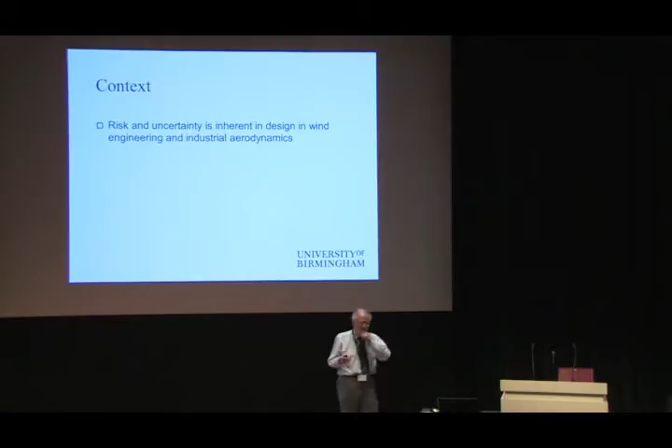Okay, what am I going to talk about today? I have come to some conclusion as to what I wish to talk about. Obviously, risk and uncertainty in wind engineering is inherent to the game. That's always going to be there.

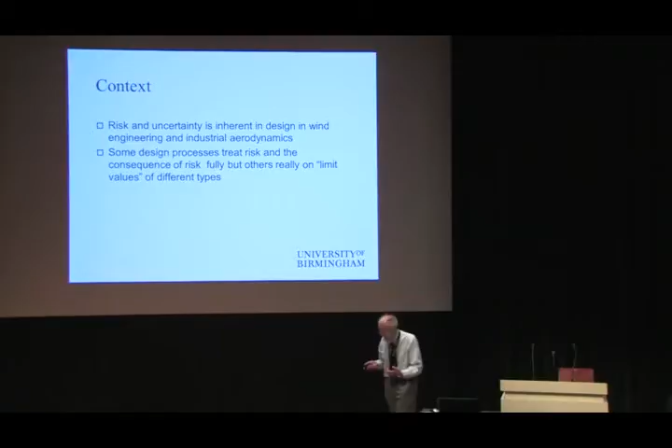Some design processes treat risk fully through risk analysis. Others tend to rely on what you might call limit values of different types. This presentation is an exploration of my own thinking on the relationship between risk and limit-based approaches, and I'm going to illustrate it through a range of applications. It's very provisional thinking. I'm working on the basis that you're a kind audience out there, and I hope you don't disappoint me.

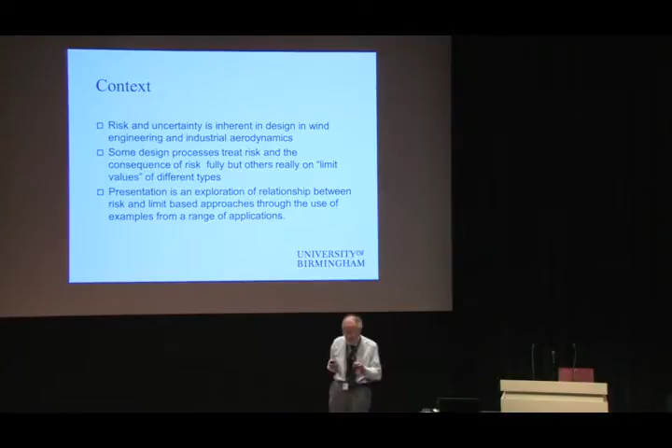These are really some thoughts I'm having at the moment, some ideas about where work might go in the future. The context: I'll give some sort of generalized framework, then go through a series of examples, and these examples are basically things from my own experience. Coming on to talk about risk and limits, and I also want to talk about the consequences of failure of systems, and end with some concluding thoughts.

So that's for the system, but then we probably need to think about the operation of the system as well, and the consequence of the failure. If the consequence of a system failing is unacceptable, we can do one of three things: we can change the strength of the system somehow, we may be able to change the stress applied, and we may be able to change the operation. Keep that generalized framework in mind, because I'll be coming back to it.

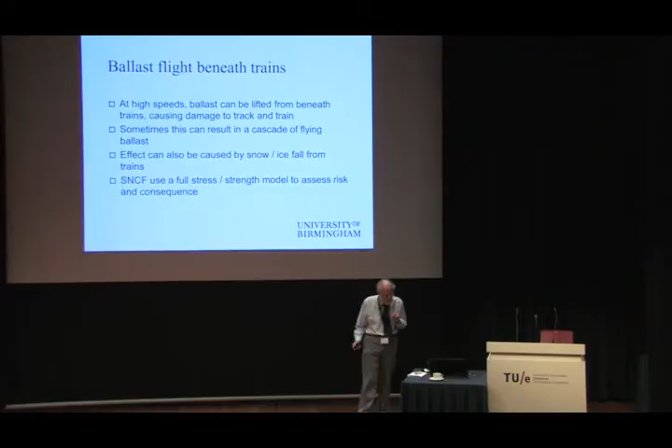The classic way, the most explicit way I've seen this done recently has been by some colleagues at SNCF, the French National Railways, who've looked at the effect of ballast flight underneath trains. When trains go above a certain speed, ballast tends to take off and it can do a lot of damage. And there are some pictures.

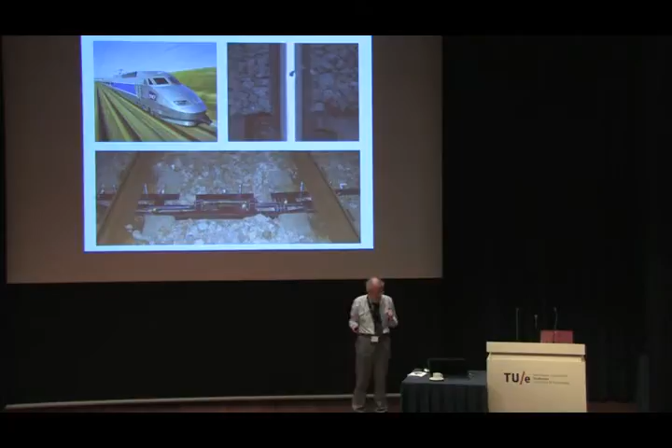That rather boring picture on the top right is just a high-speed line in Britain. It's just a track with a hole in it where a bit of ballast has been ground down between the rail and the wheel. When that happens a lot, it's actually quite expensive to do the maintenance on it. And there's some experiments we've done on high-speed lines as well.

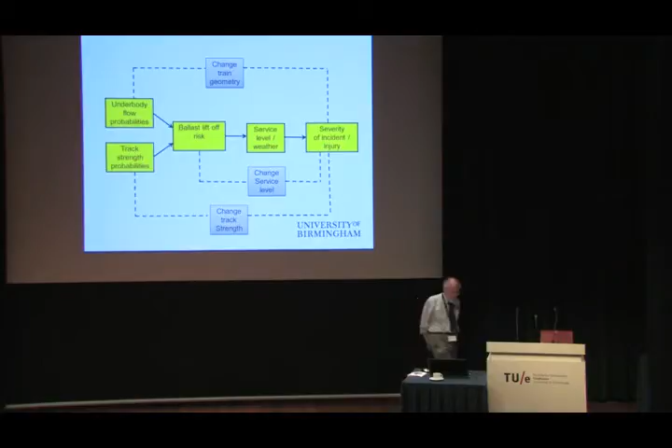SNCF have actually used this sort of approach quite fully. They've looked at the probabilities of underbody flows, they've looked at the probabilities of track strength, they've got a risk function for ballast liftoff, all probabilistic. They put that together with some knowledge of the service level and the weather, and looked at the severity of an incident. And then they have three possibilities.

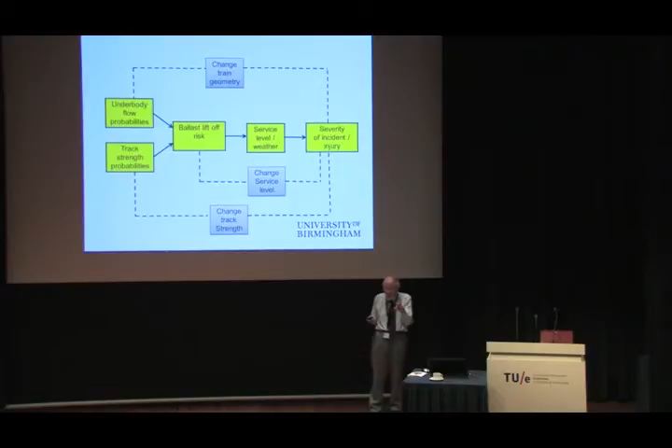If it's really bad, they can change the train geometry to change the airflow under the train. They can change the strength of the track by doing something with the ballast. Or, as they mainly do in fact, they just change the service level—they reduce train speeds when there are issues forecast. That's a nice way the entire system has been put together.

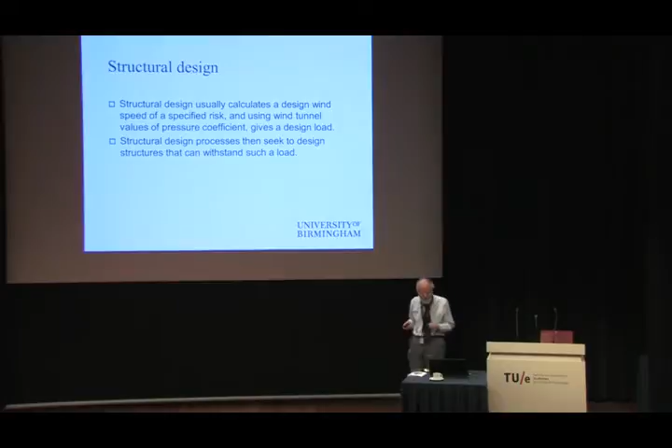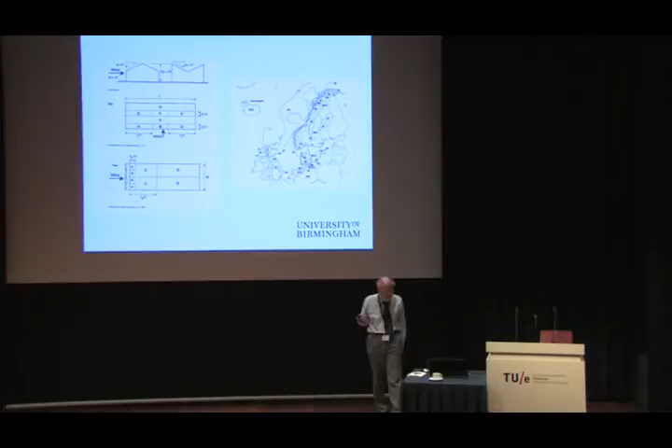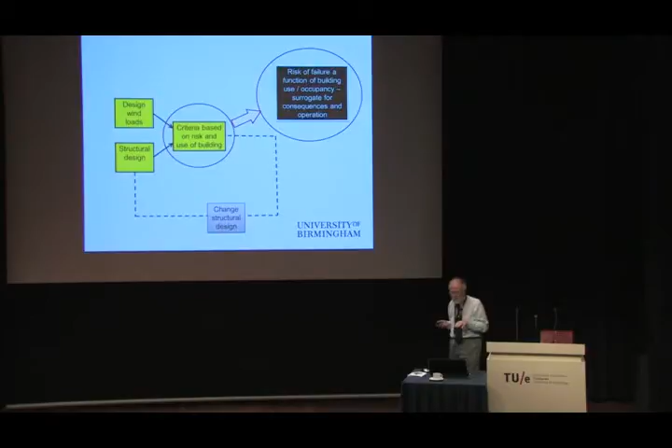Actually, the design process, when you look at it, is a very cut-down version of that generalized framework. You start from the design wind load and the structural design, you put it together based on some sort of criteria of risk, cost and use of building, and you then change the structural design and go around that loop until it works. But inherent in that, the criteria we use actually embed a knowledge of the risk of failure as a function of the building. It's in a way a surrogate for consequence and operation.

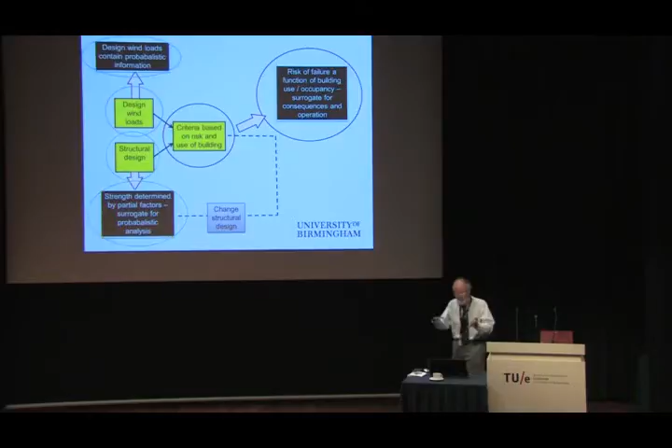And similarly, the structural design has probabilistic information in there, but it's in there by way of partial factors as a rule. And the design wind speeds, again, is a way of encoding probabilistic information. So it's, if you like, almost a limit-based system, but inherent in it, implicit in it, is a lot of the bigger risk analysis there.

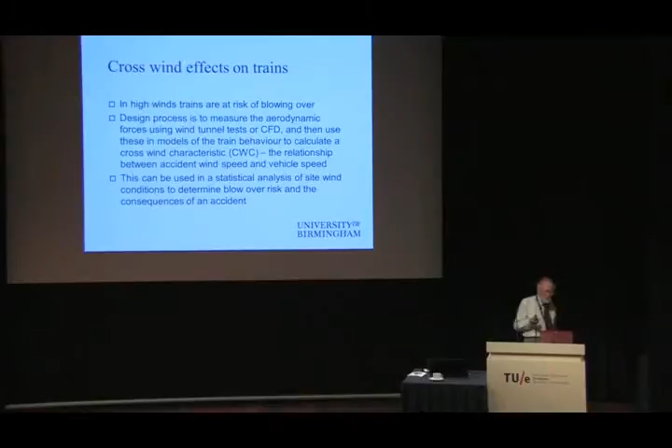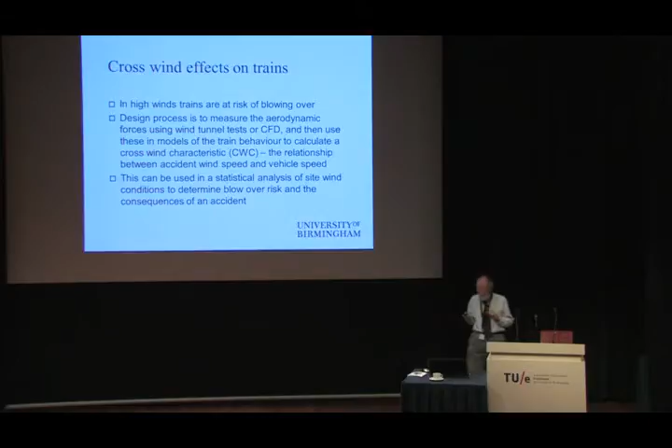If you look at something that I've spent a lot of time on over the years, the crosswind effects on trains. Trains do blow over sometimes. The design process is usually to measure the aerodynamic forces using wind tunnels and CFD, put those into some sort of model of the train behaviour, and you get what's called a crosswind characteristic, the accident wind speed against vehicle speed. And then that can be used in a statistical analysis of the site conditions to determine the risk and the consequences of an accident.

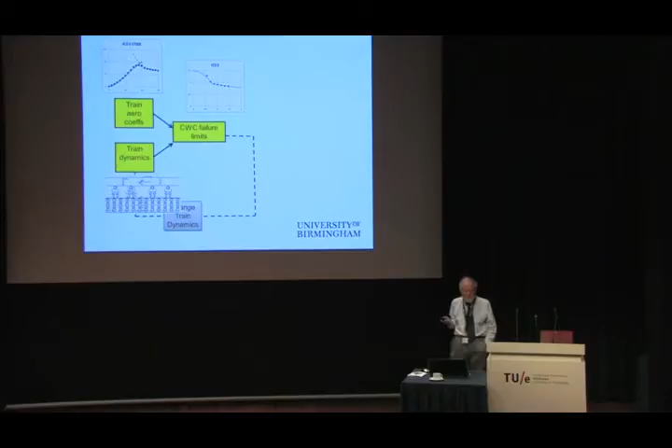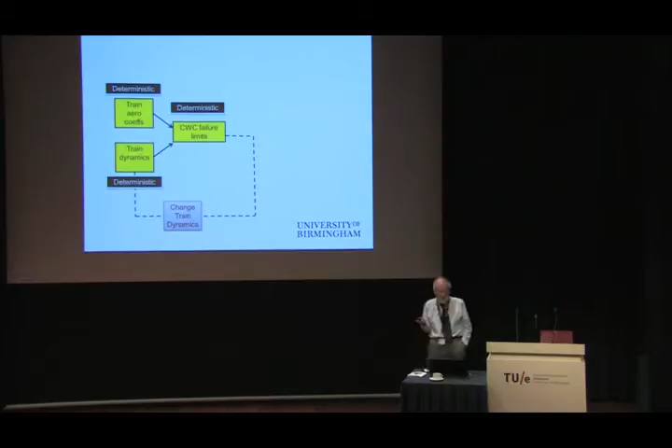They take the train aerodynamic coefficients and the train dynamics. The train aerodynamic characteristics might look like that. The train dynamics might be a 63 degree of freedom system. And they calculate a plot of accident wind speed against train speed. And that's as far as they go. Now, the problem is, in that case, they are all deterministic functions. They are not probabilistic functions. And the justification is experience suggests that those limits are adequate.

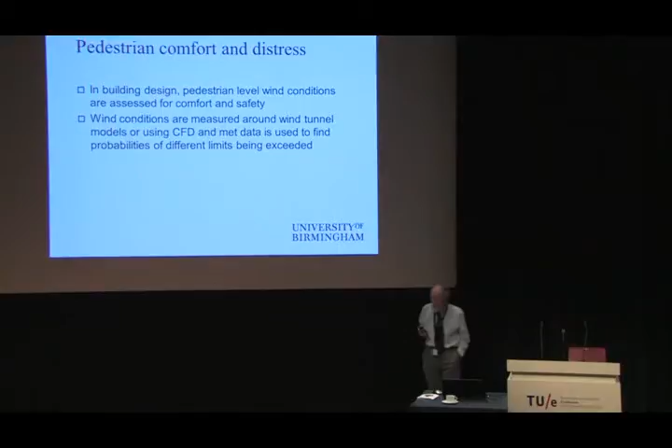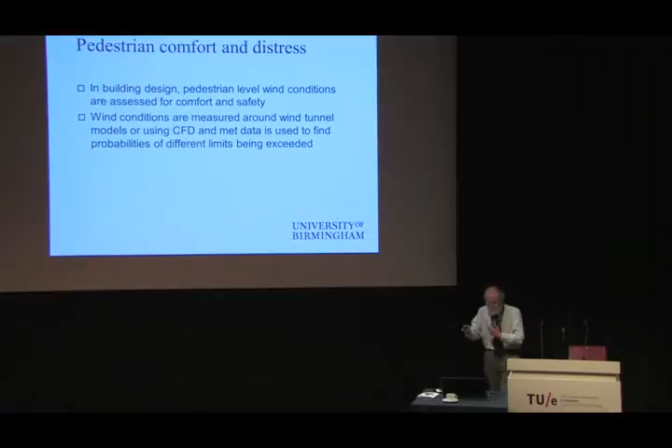So a limit-based approach. Another one which is perhaps more in line with the sorts of things that Bert does here. In building design, of course, pedestrian level wind safety is important. Wind conditions are usually measured around wind tunnel models or using CFD and MET data to find the probabilities of different wind speed limits being exceeded.

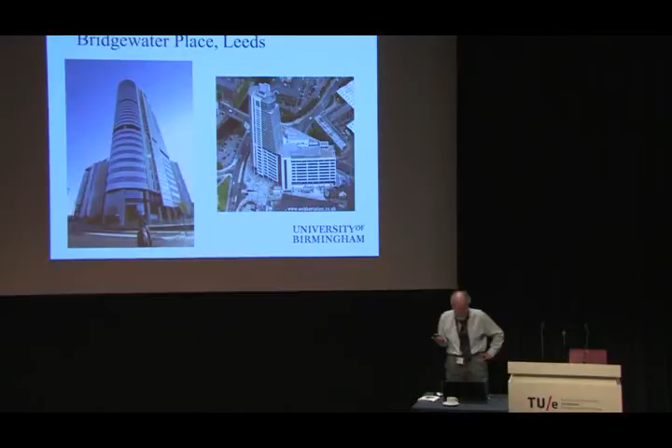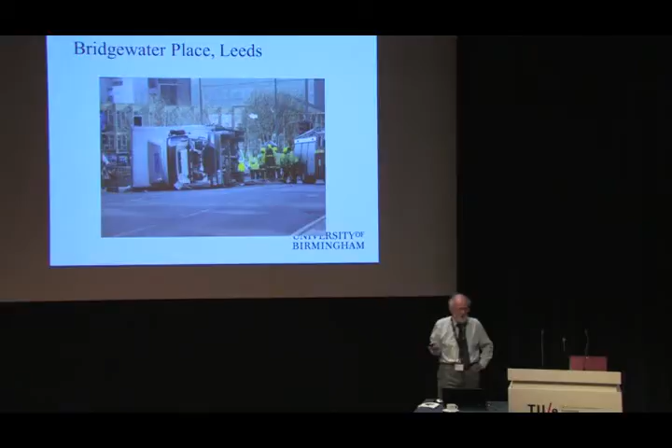My interest in this was brought about because of a huge new building in Leeds in the north of England that had severe wind problems around the base, with people blowing over and finding real difficulty walking. But tragically, a lorry blew over around the base of the building and actually killed somebody, and raised the profile very significantly.

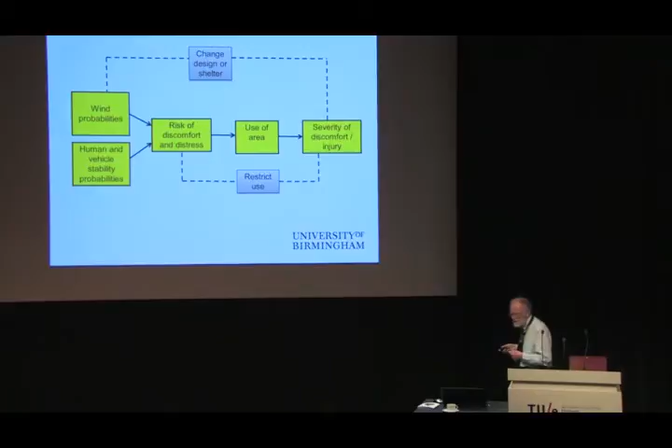Now, again, the full approach: you start off with wind probabilities, you have some idea of human and vehicle stability probabilities, you calculate the risk of discomfort, maybe distress, you look at the operation of the area, and you look at the severity of the discomfort and injury, and then you can change the design or shelter the design. You might restrict use in certain conditions. Some of you will know, you've experienced it.

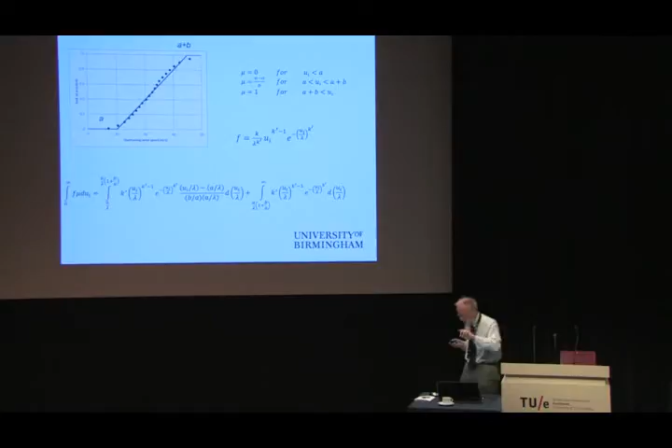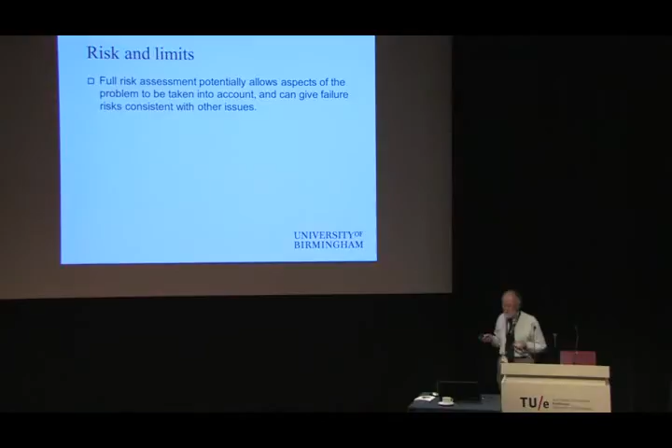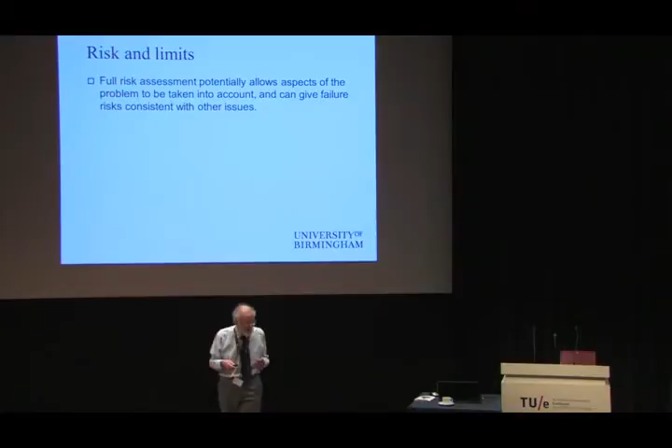So, where do these thoughts lead me? Well, obviously, I think if you're in a position in design to do a full risk assessment, that allows potentially all aspects of the problem to be taken into account. And more importantly, it gives us a risk that's consistent with the other sorts of risk assessment that are done in other aspects of the design other than wind loading. So it can actually be completely consistent with other ways of looking at the matter. Without doubt, this can be complicated.

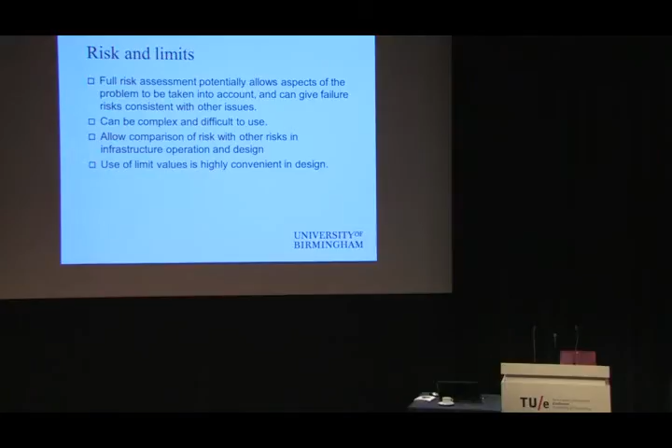But I say it does allow a comparison of risk with other risks. The use of limit values, though, is actually really convenient. It's quite easy. But when you get to limits, I would like to make some points. The operation and the consequences of that operation are only taken into account implicitly in the use of limits.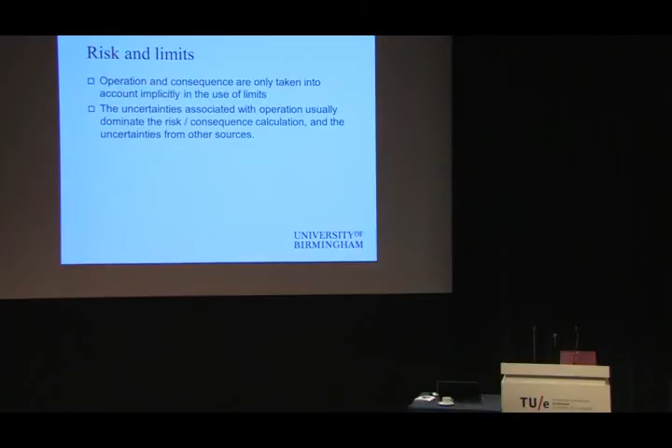Most of the time, the uncertainties associated with the operation usually dominate the risk consequence calculations from the uncertainties from other sources. Now, that might be hard for wind engineers to stomach, that the risks they calculate are really irrelevant to the risks of operation, but most of the time they are.

And as limits tend to be deterministic and can be treated as precise targets by designers, they can actually distort the design process. For example, and here, my apologies if I annoy anyone with these, I have known people look at structural design codes, and actually note that if they move their building a bit so it's a bit further away or a bit closer to the sea, they can get a significant reduction in the load by going into another category in the code. And they sort of look at the data for the most extreme high tide and then use that as their baseline. It's got no relevance to reality, it's just getting something through the code.

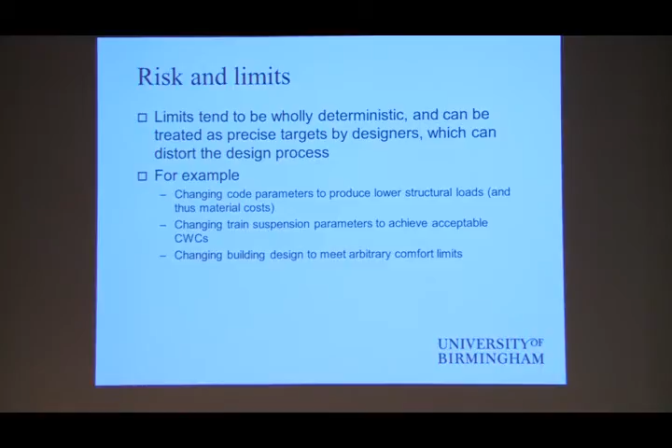Similarly, on trains, if you want to get your crosswind characteristic below a certain level, you might be able to tweak your train dynamic system. Again, that's great, it gets your train authorised. It's got no relevance to reality at all. And similarly, if you change your building design to meet your 5 metre a second comfort limit that you've got in Holland, then, well, that's okay, but when you look at things in big terms, it really isn't very sensible.

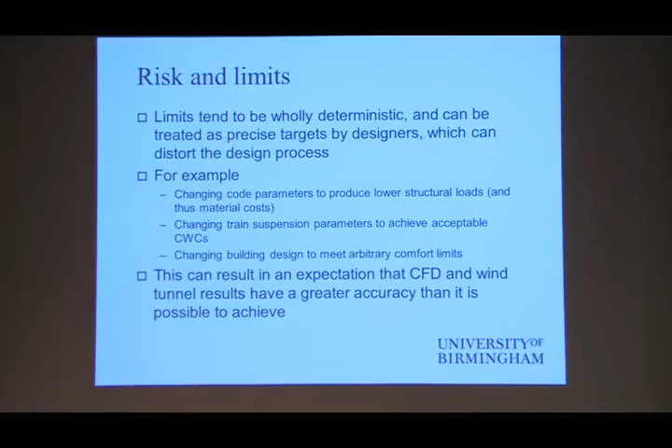And what's more, actually, when you're working with these design limits, it can result in an expectation that CFD and wind tunnel results have a much greater accuracy than is true. If you're trying to work to these precise limits, you want your CFD and wind tunnel to be really accurate. And those of you who do CFD and wind tunnel results know that you can't do that. You always have uncertainties there. So I just worry about the use of limits in some way.

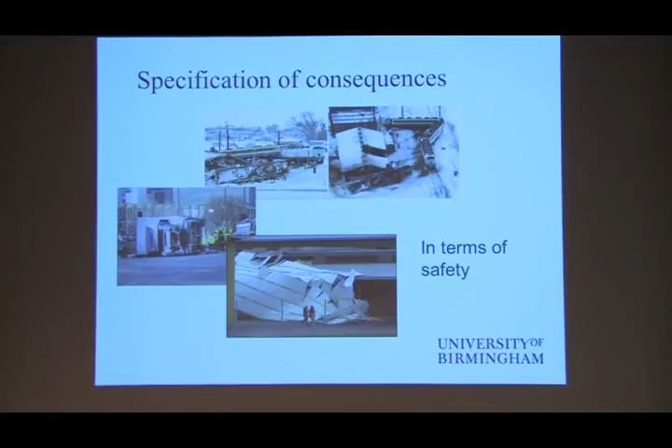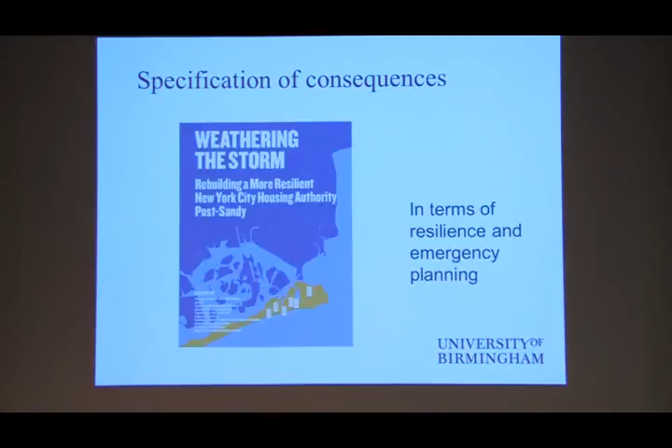Come on to consequences. That's at the end of the chain. It's not something that engineers usually think about. How do you actually specify consequences? Maybe in terms of safety, maybe in terms of costs and benefits, maybe in structural design, maybe in terms of resilience and emergency planning. It leads to different sorts of design. These days, maybe in terms of the broader picture of sustainability, and there we've got the 3 pillars of sustainability, or more and more in urban design, people are looking at different future scenarios.

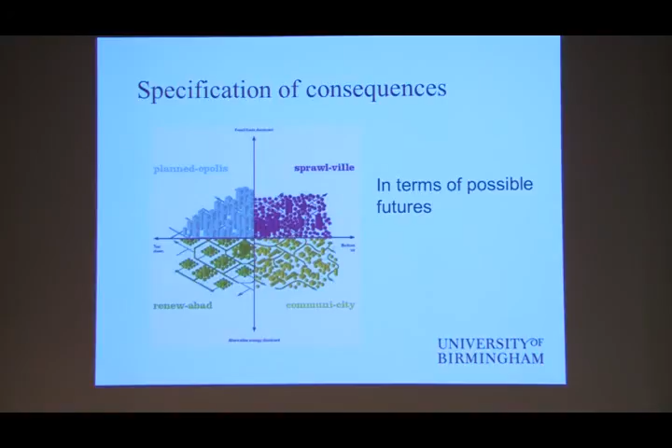How do you specify consequences? Lots of ways of doing it. They're just some of them, no doubt there are others. And the language or the specification of consequences is very different from engineering languages.

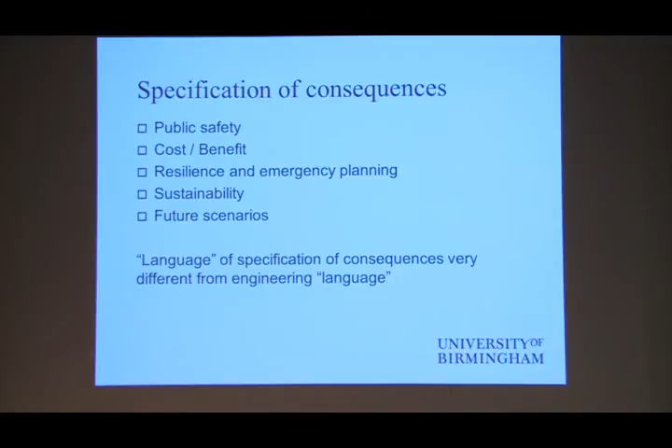They like my presentation so much at the front here, they're waving their programs about at me, the yellow ones.

Almost done. How should engineering-based risk calculations be related to such specifications of consequences? That's not a question engineers normally ask. We don't like the fuzzy bit of the consequences. I actually think it's a question that's vital that engineers should be involved in. I don't think engineering should stop at the simple risk assessment. Philosophical point, maybe. So, some concluding thoughts.

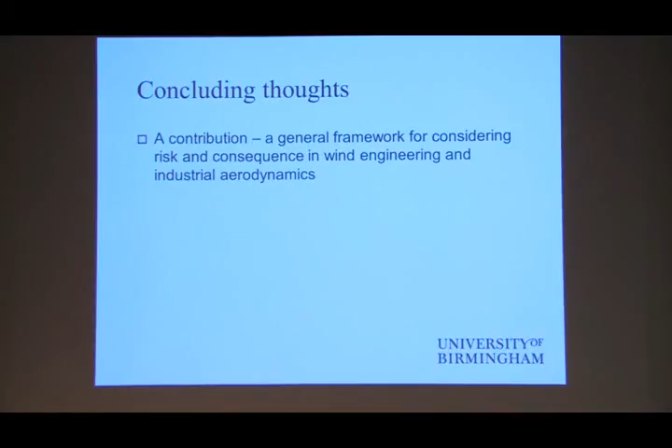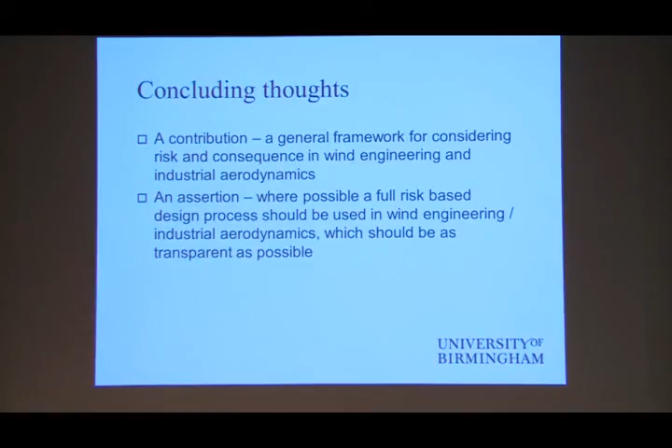Maybe the general advice framework there is a contribution to the field of helping us think clearly about risks and consequences. Maybe not, you might say. An assertion: I would make the assertion that where possible a full risk-based design process should be used in wind engineering and industrial aerodynamics with the components as transparent as possible.

A plea for the greater recognition of the limitations of limits, if that makes sense, and for their sensible interpretation and use. And that all of us who are educators should actually get this through to our students, who, as one grows older, it seems to me that students become ever more deterministic rather than statistical in their thinking.

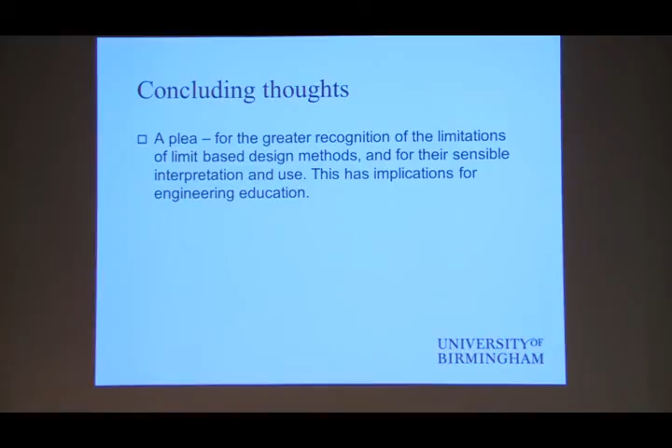And a suggestion. Serious work, I think, is needed on how risk assessment methodologies in our field actually interface with the calculation and the specification and the vocabulary of consequences. And there's a lot of work to be done there.